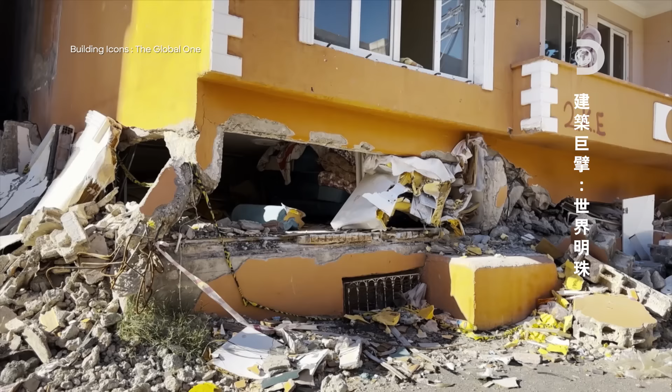To do so, it's having to meet challenges that few other building complexes have to face.

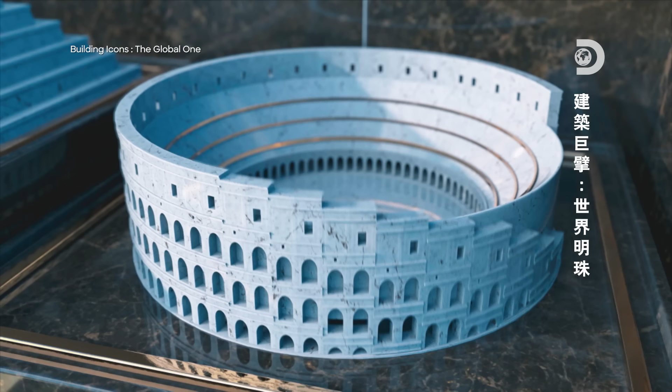That's why they call it the Global One. Taiwan is part of the Ring of Fire around the Pacific, a seismically active zone prone to earthquakes and volcanoes. It is also a typhoon basin, and storms sweep through on an annual basis.

This is the world where the Global One, an ambitious high-rise project, is being constructed. So building a new residential complex is a challenge in itself, and the Global One is not just any residential complex. It will consist of 250 residential units and 54 floors of offices. It's going up as part of a new urban center for Taipei in a district called Nangang.

It will center around several key landmarks. Nangang Station, a major rail hub 20 meters underground that serves as the main entry point for the whole area. The National Biotechnology Research Park is an innovation center built with sustainability in mind. The Taipei Music Center is the largest pop venue in Taiwan.

It's also a hub for music and cultural activities designed to promote culture and bring performers, creatives, and the public together. And then there's the sprawling Nangang Exhibition Center, which brings in the crowds for trade shows that present Taiwan's technology and innovation to the world.

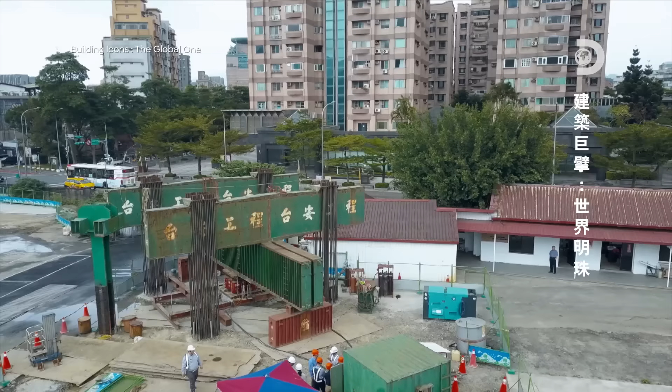In Nangang, every week brings something new. A city shaped by people, creativity, and the constant rhythm of events that never stops. Building a huge complex complete with multiple high-rise blocks is never going to be easy. The Global One's originator is determined that it will stand strong and endure. That's not going to be easy in Nangang. It means taking on some particularly risky geology.

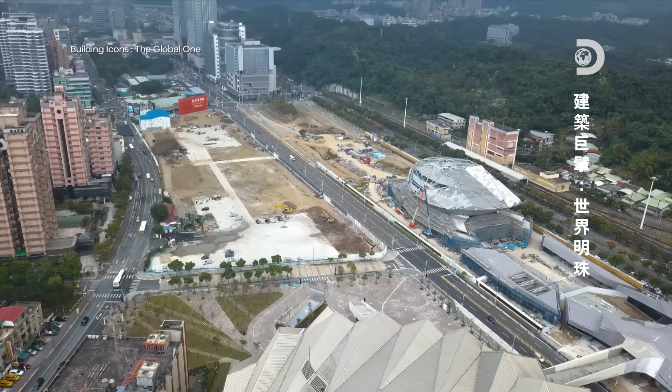There's a groundbreaking ceremony. Even as it's happening, Nangang's special vulnerability to earthquakes is at the forefront of everyone's mind.

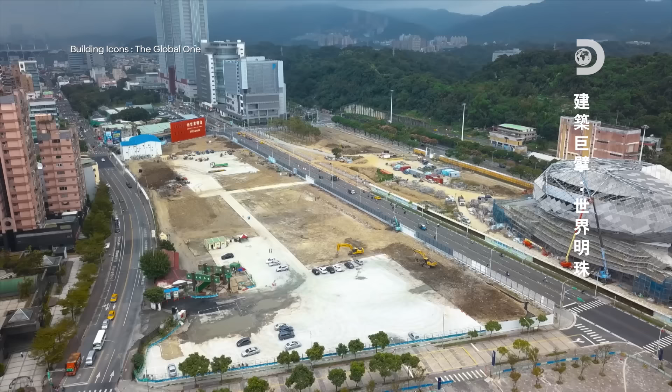The Global One is being built on the site of a former tire factory. It's being built to make a statement and to last for generations of Nangang residents. The ones carrying out the vision? The owners of the original tire factory.

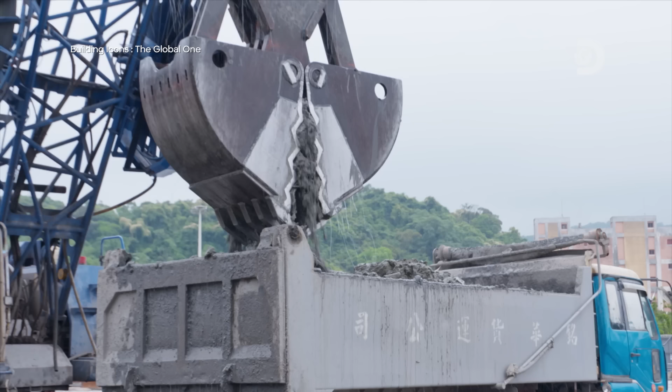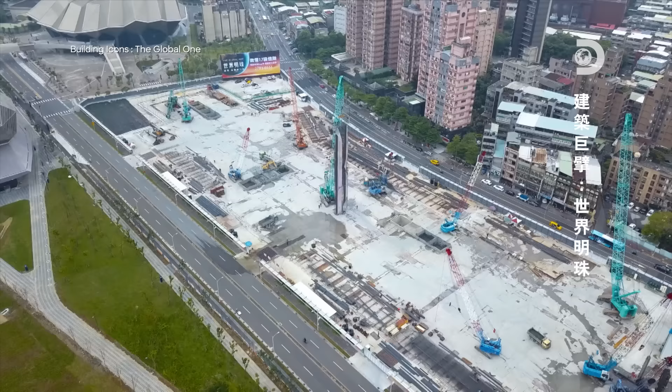Chairman Lin's vision is clear, but making it a reality is going to be particularly challenging. The biggest challenge is coping with the soft soil. The Global One has to be built both upwards and downwards at the same time, growing out of a set of ground-level slabs. The base is surrounded by a diaphragm wall 1 meter thick and 37 meters deep. The wall combines with a set of piles to form an artificial rock plate that anchors the buildings.

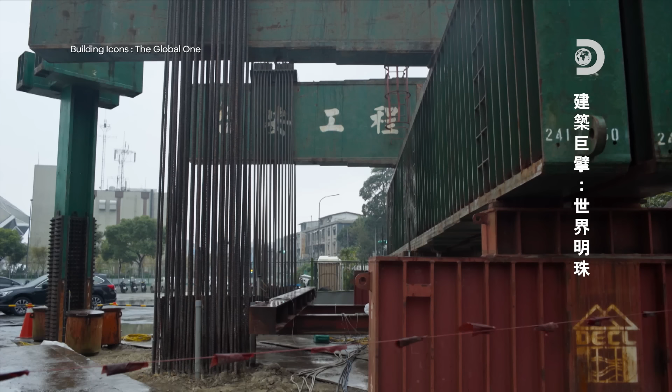Before anything goes into the ground, the piles have to be tested. A total load of 3,400 tons is placed onto a sample pile to ensure it can withstand everything asked of it.

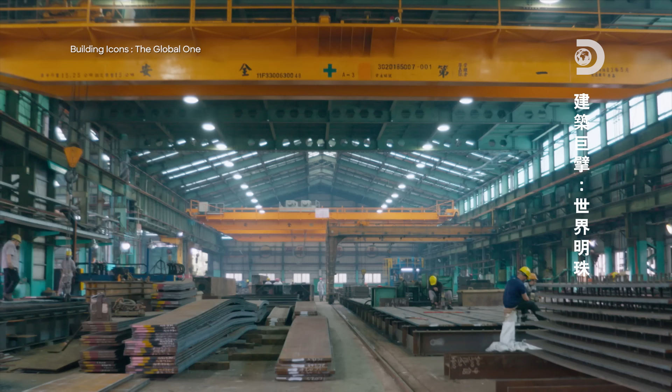It's tough work, but it can't be avoided if the Global One is to be safe. A steel factory on the outskirts of Taipei. Hundreds of massive steel columns are being manufactured. They're going to form the skeleton of an extraordinary new development, the Global One in Nangang. The building complex is being designed to withstand anything that nature can throw at it.

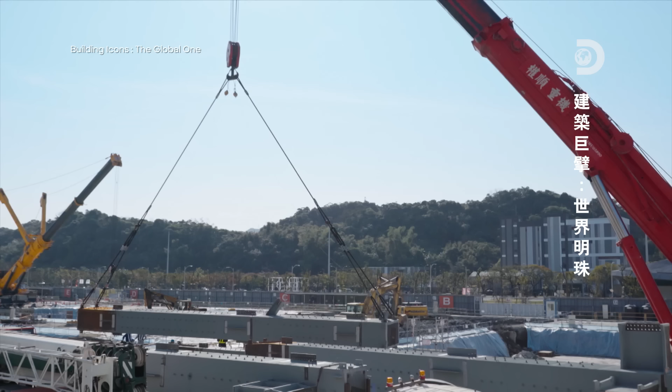Today, the first steel beam above ground is being erected, a significant milestone for the entire team.

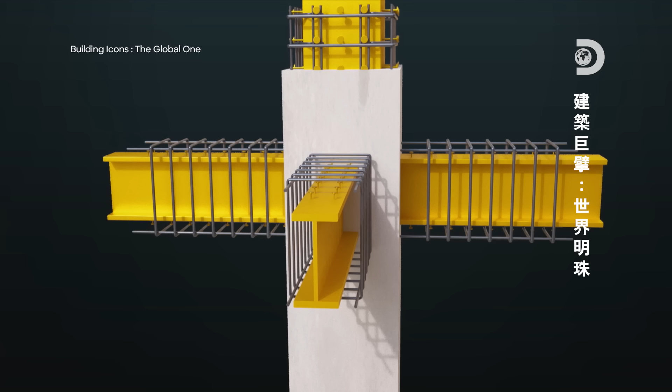The columns and beams are assembled in such a way as to maintain integrity and dissipate energy from any seismic event or strong typhoon winds, themselves an additional force to contend with in Taiwan.

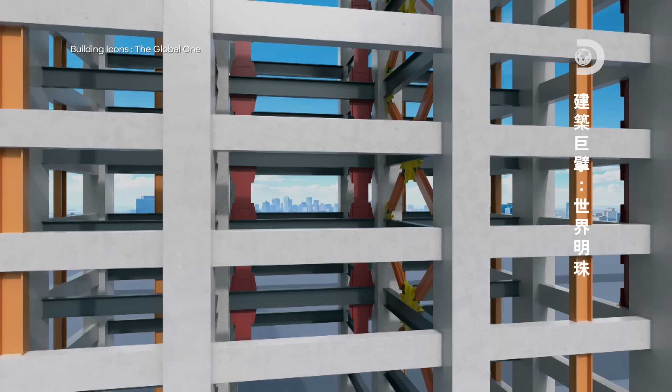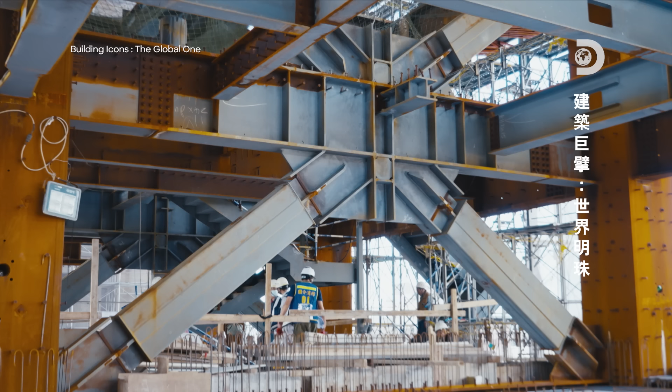The internal materials of the braces absorb seismic energy when nature strikes.

The floor layers make the building's overall rigidity better, preventing excessive swaying. With foundations and a skeleton like these, the Global One isn't going anywhere.

Even in the case of the most severe earthquakes, the priority is always the safety of the residents. Even so, earthquakes will cause the building to shake, which can be terrifying for the people inside.

So the designers are finding ways to minimize the building's movement.

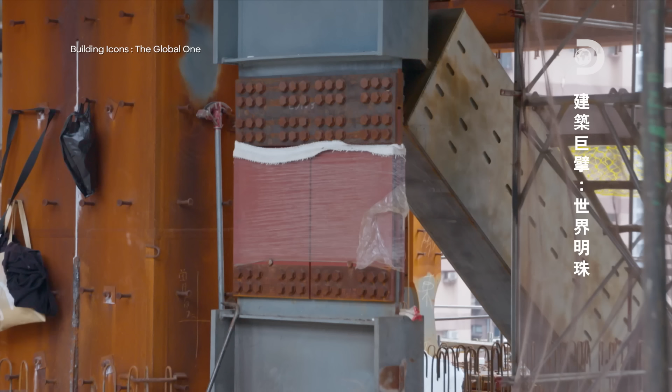They do this through nearly 800 special units in the wall, designed to reduce the amount the buildings will sway in strong winds and earthquakes, damping down any oscillations and making the buildings feel more secure to the people inside.

With these dampers absorbing the motion caused by an earthquake, the building should feel more stable if the worst happens.

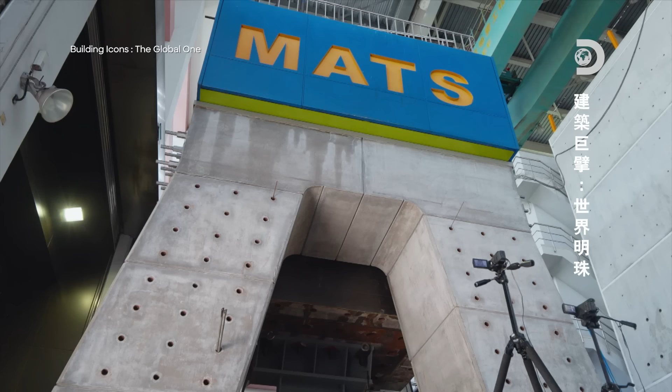But of course, just like the piles earlier, the damper structures have to be tested. Nothing will be left to chance when it comes to safety. So the team have to set up their own testing lab at the National Center for Research on Earthquake Engineering.

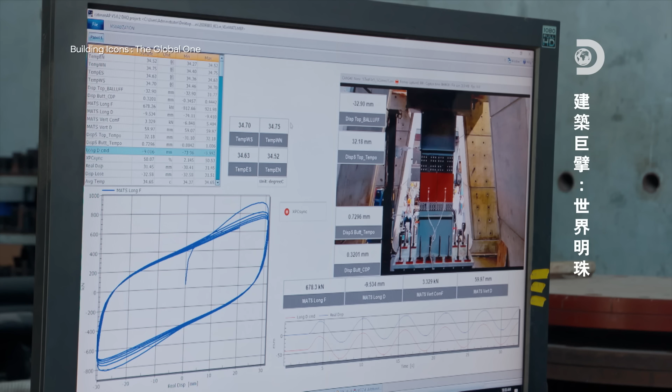It's more commonly used in the high-rises in Taipei's central business district. But if people are going to live in the Global One, they're going to need to know that their building has been subjected to tests like these.

The Global One receives a safety rating up to the intensity at which nuclear power plants have to be shut down. It's a greater rating than even teaching hospitals, among Taiwan's most protected buildings.

The engineers are determined to make the Global One last.

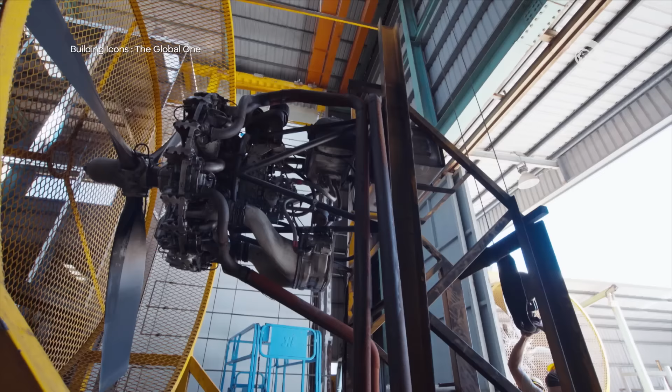The Global One will have to be strong enough to resist Category 17 winds with speeds up to 220 kilometers per hour. This is a strength equivalent to standing behind a jet engine at full throttle. It's the strongest wind possible beyond the power of any normal typhoon.

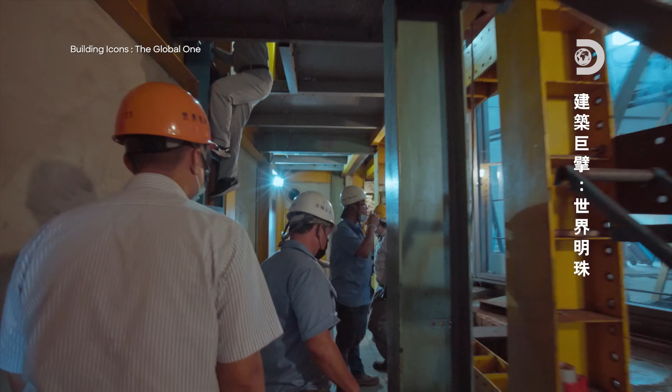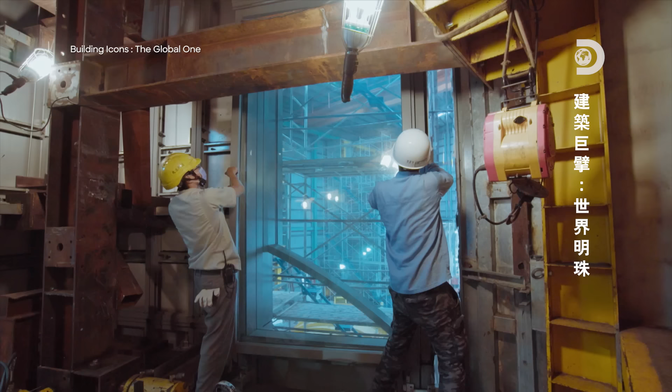Can it take the pressure of all this wind and rain?

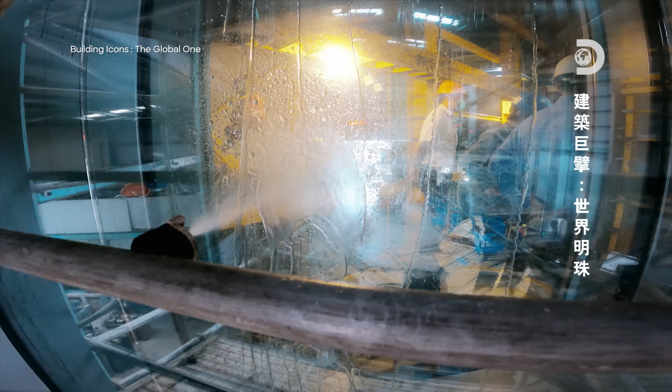High-speed fans and walls of water blast the construct. The test typhoon has been unleashed.

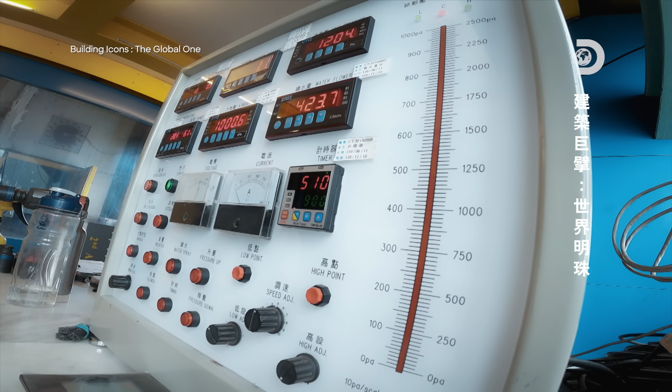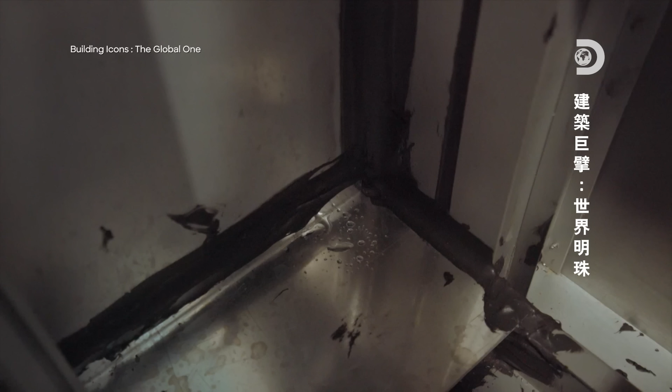Every part of the rig is monitored. The engineers scramble. There is a leak.

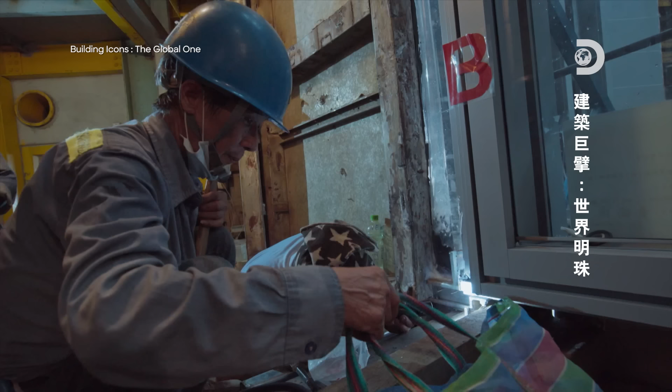For now, the engineers fix the leak quickly with silicone sealant.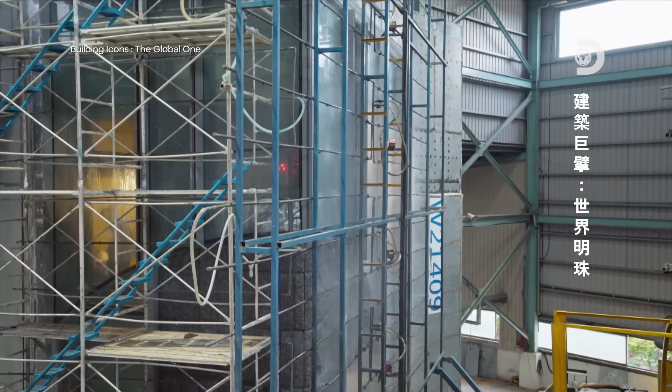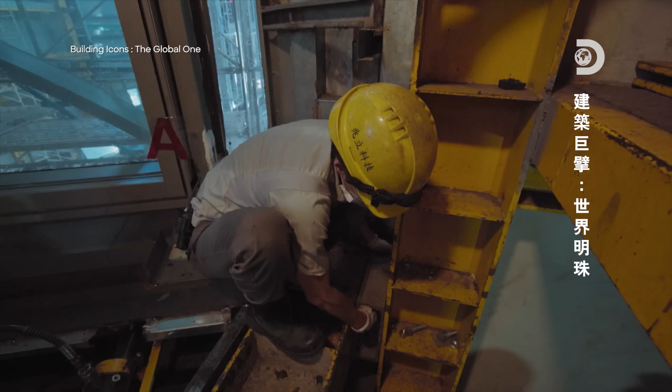The force of an earthquake mostly hits sideways. Can the walls flex with it without being damaged?

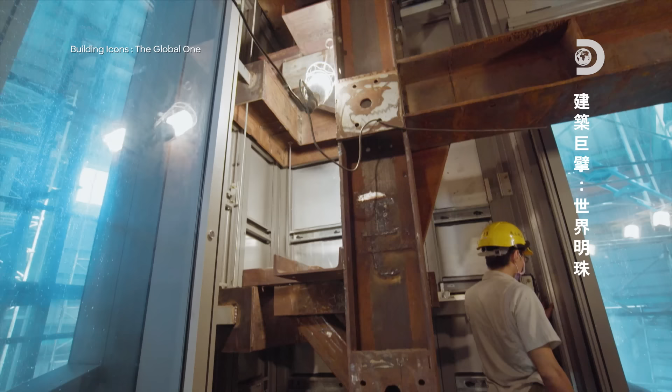It's a success first time around. Once the construction has been fully tested, the window units can be fitted onto the building.

They're 2 centimeters thick, enough to keep out even the worst rain, wind, and noise.

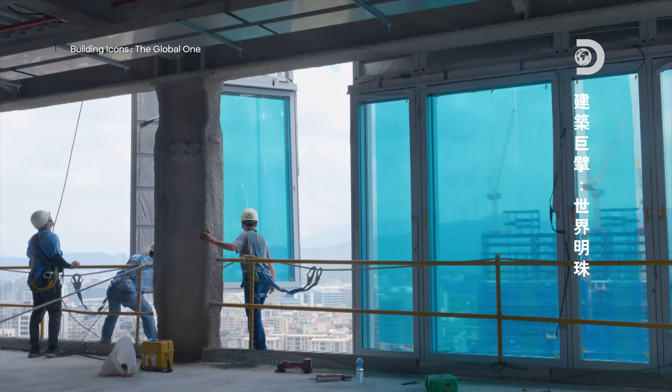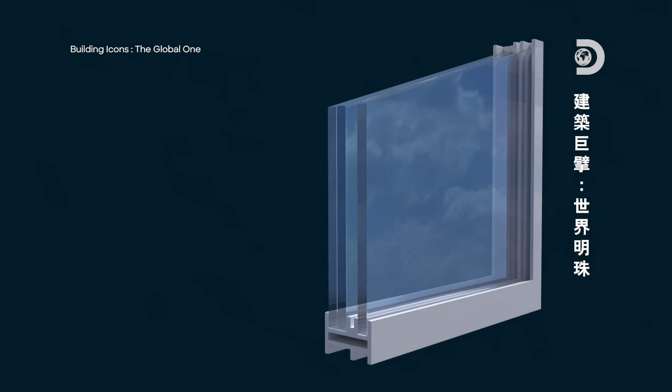The windows contain many layers: tempered glass, explosion-proof coatings, another layer of tempered glass, another coating, a gas layer, and one more layer of tempered glass.

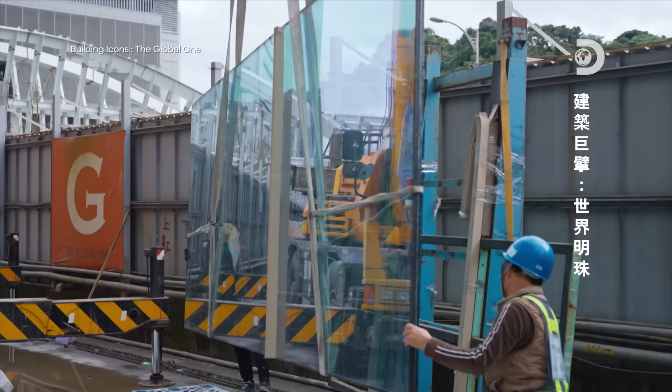The main windows in each apartment measure around 6 by 2 meters. They are not only huge, but they are heavy, almost a ton each. Getting them in place is going to take weeks.

20 workers needed 2 hours to just get one of these windows fitted. There are going to be 46 of these, and 500 more panoramic windows of almost comparable size.

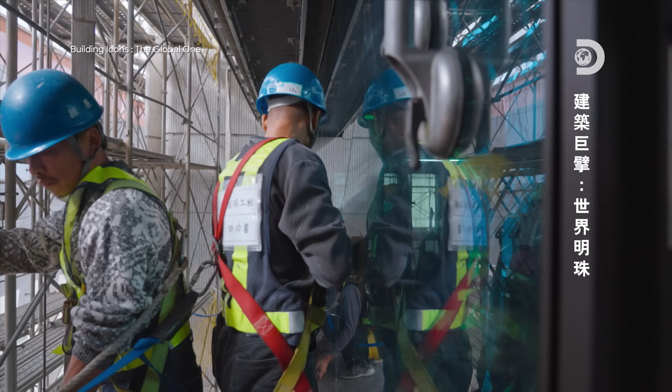The glass is just one of the main features of the Global One, but the rest of the exterior needs to look just as good. And that means more challenging materials.

The Global One, a huge new building complex in one of Taipei's former industrial zones, features a monumental amount of glass on its exterior. The rest of the building is concrete, and this needs to be covered.

Taiwan's buildings are often clad with many thousands of tiles, but these are essentially just stuck on, and over time can become detached, looking ugly, and causing a real danger to anyone below.

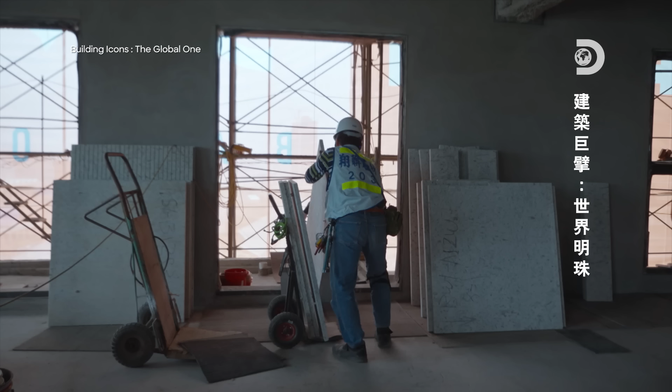So instead, the Global One will be clad with another premium material, granite. The granite slabs are large and heavy. Should one fall off, well, it would cause a lot more damage than a simple tile.

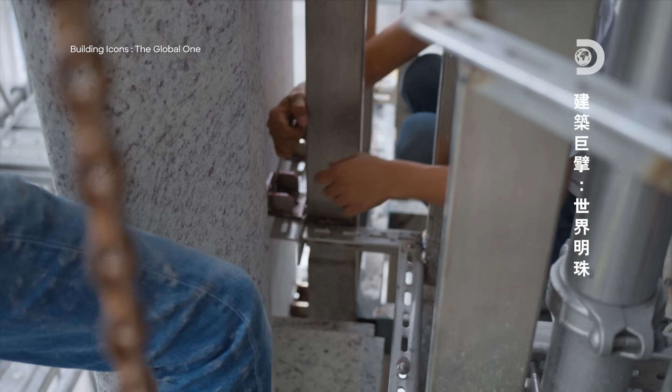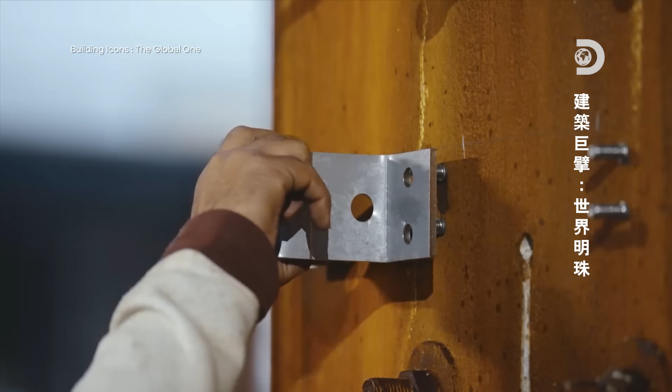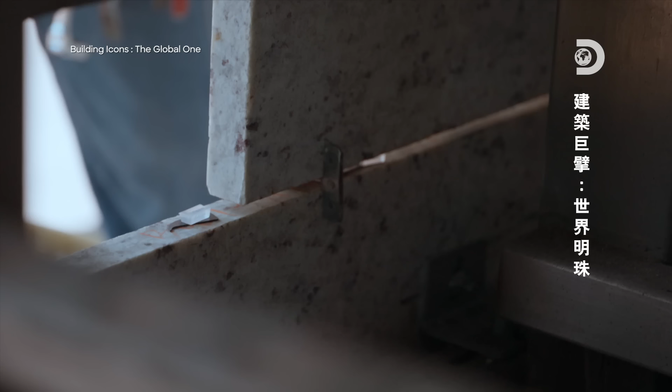外墙石材，目前整个工地量体非常大，有145万多材，重量一片最重达到450公斤。为了克服这个问题，在混凝土还没有灌浆之前，在钢柱上面先植入喜得丁的螺旋螺栓预埋件，然后在表面上做配筋补强，再灌10公分的包覆混凝土。安装石材时，把钢构上面的铁件再跟骨架系统连接，确保强风强震时没有问题。The way they are anchoring the stone cladding means their weight is transferred to the inner steel frame, and from there to the main body of the building. The cladding becomes part of the actual structure, not just a covering, and cannot be pried off by high winds.

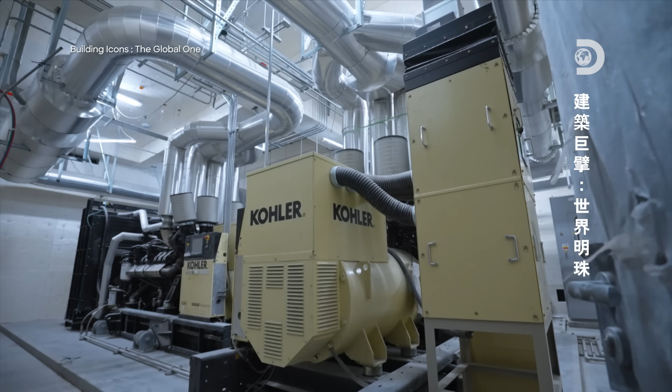A building is more than just its fabric. A constant power supply is vital. The Global One has 2 main power supplies, so if one is damaged in a seismic event, the other will hopefully remain intact. And should the worst happen and both are put out of action, the building has 2 power supplies of its own. 消防的是2台1500千瓦的发电机在B1，万一停电的时候，它会自动转成发电系统，供应整栋大楼维生的消防设备，适时供应电源，不会影响住户的生活品质。发电机容量至少可以让它在8小时以内运转都没有问题。

A defining feature of our time has been the global COVID pandemic. There are always concerns when people are living in close proximity with shared resources. Some experts even fear there will be a major epidemic every 10 to 15 years. The Global One is designed with systems to minimize the spread of an outbreak of airborne disease.

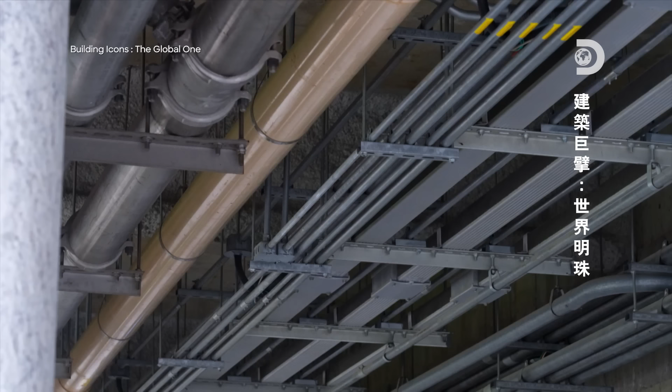我们是用单独的管道间去克服这些病毒，每一户都有固定的施气阀，让空气可以出去，但不会进来，让病毒可以排到管道间，直接排到风机里面。但其他楼层的病毒不会经过管道间，爬到当层的住户里面。Each home has its own aircon system.

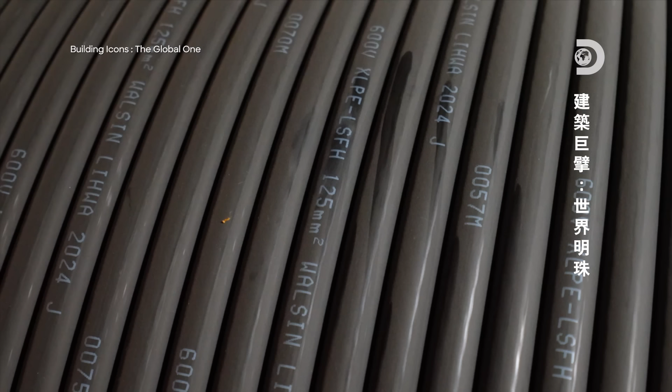A heat exchanger brings in air from outside and expels stale air. But the heat energy in the warm air is captured on its way out to reduce the load on the system. Interior materials have also been considered very carefully. Paints are all non-toxic and lead-free. Everything has to be hypoallergenic to keep the people inside comfortable. Even the cabling has been carefully selected.

我们用这种无烟无卤的电线，真的碰到火灾的时候，它不会产生浓烟，也不会助燃。它几乎把一些传统电线可能产生的问题全部克服掉了，但相对它也非常贵。这些都是我们对客户所做的承诺，跟我们对生命的尊重及保护。Water and waste pipes are all made from stainless steel to ensure they're strong and will last a long time in top condition.

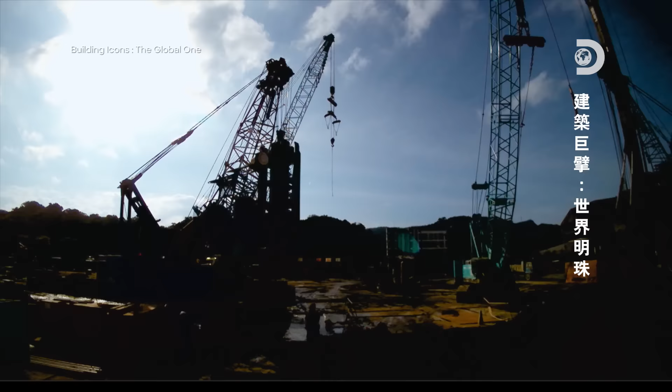And that's what one dedicated part of the team has been looking at. The Global One is going up as part of the regeneration of Nangang, a former industrial zone in Taipei. It's a huge mixed-use complex, and the vision is to make it one of the best places to live. With so many residences and offices over an area of 30,000 square meters, there needs to be a lot of planning to get everything just right.

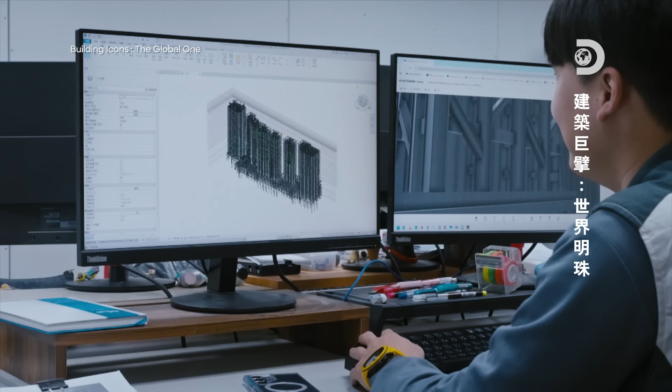Major public projects often use a system called Building Information Modeling, or BIM. So that's what they're using here. The whole complex is simulated in a vast computer model, so any errors or inefficiencies can be spotted before they're built in.

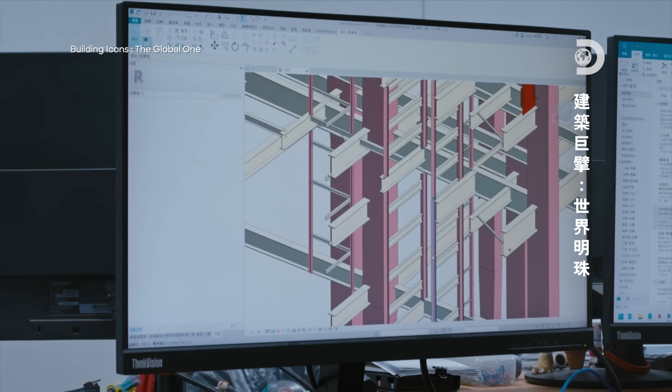A separate climate simulation system has been used to work out how to keep all the apartments comfortable at a pleasant, even temperature, which isn't always easy in the hot sun of Taiwan. And within a steel and glass building, you can, of course, use aircon, but it's expensive and no good for the environment. So at the Global One, they're introducing a special sun tracker.

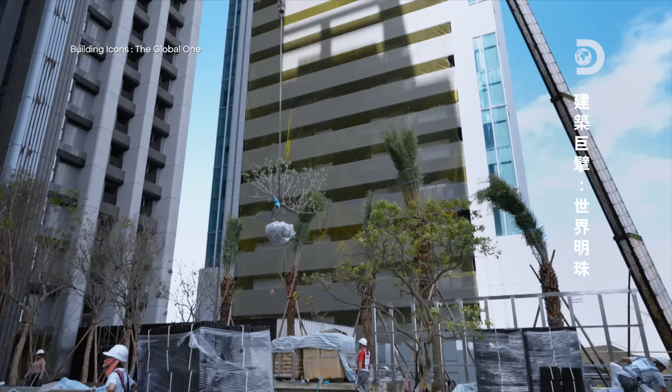Of course, all this water, soil, and green mass is very heavy. The engineers have to take all this additional weight into account in the design.

里面是空的，弄点水，让它不要有空隙在里面。我们先以每平方2吨的重量来设计我们的结构，一般在公共建筑，楼板最多载重也是到500公斤左右，我们在瀑布的部分跟水域的部分甚至提升到3吨，在2楼的部分，我们的梁排得非常密。

All in all, the green areas at the Global One cover over 8,000 square meters and reach all the way to the nearby mountains. It's designed to connect the people that live here with the natural environment beyond.

需要住在森林里面，说山中有林，林中有屋，这种的期望。我们种一些牡丹、茶树、马缨丹这些东西，山茶花比较能够诱蝶的那种植栽。诱鸟的部分，我们有种一些果树，荔枝、杨梅、树葡萄这些，吸引鸟类来这边采撷，营造出自然共生的环境。

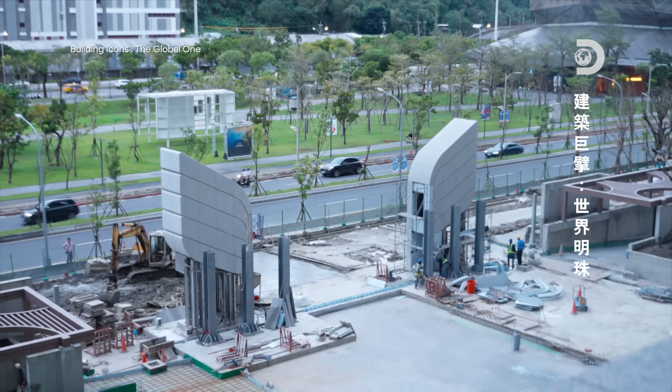One of the last elements to go into the new Global One complex in Taipei is about to be fitted. The craftsmen are putting the final touches to a set of bronze gates. As the first thing anyone will see as they enter the complex, they have to be just right.

大门的话，单扇是3吨，组起来会到6、7吨以上，所以非常重。在结构上面，我们都有做过结构计算、风压测试。

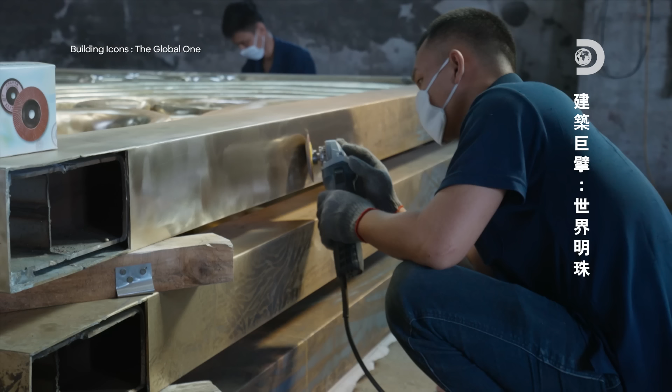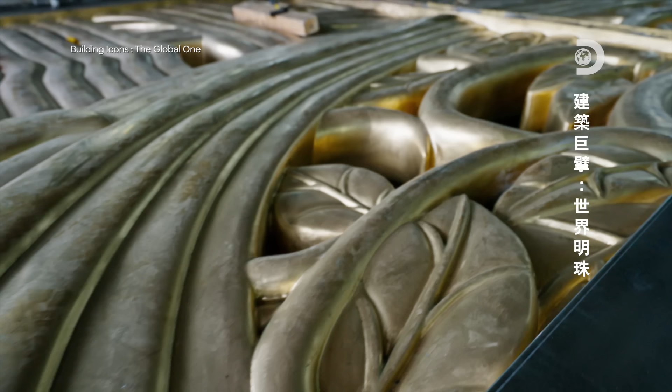这个锻造手工打磨拢不一样。表面处理颜色的部分，希望把叶子跟边框改成稍微暗褐色的方式，让它感觉跳脱出来有渐层，让这个大门看起来不会太单调、太死板。我们会先做一面起来看看，然后再继续调整让他们满意。

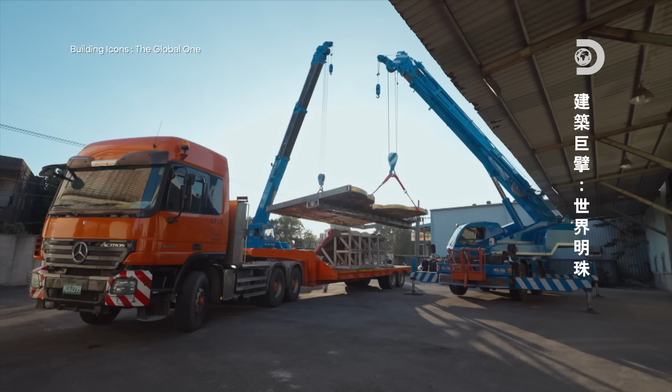大门大概有12米，高度大概5米多。工厂制作完成到台湾之后，在工厂这边也会做一些假阻力，确认吊装没有问题。这个尺寸要运送到工地，一般的拖板车可能都是困难。The gates are ready to go, but they are too big to get through the factory gates lying flat. And if placed vertically, they will collide with streetlights and other obstacles en route. So a special frame has to be constructed to hold the massive gates on a slant. Nonetheless, the gate only just clears the road signs as it travels.

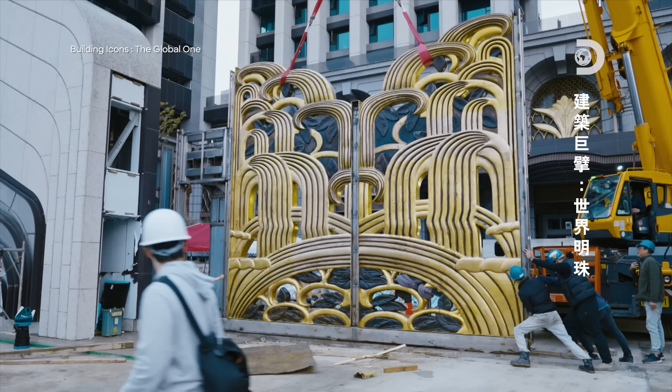As the gates are being fitted, the team can look back on the challenges they encountered during construction.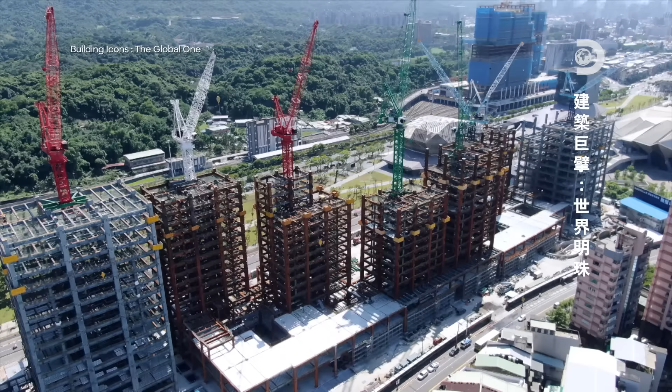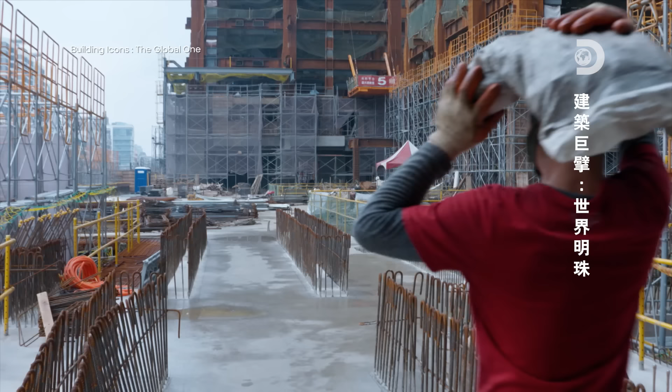这么大的量体，这么高规格的设计条件之下，能够不要延误工期，如期安全，品质没有问题下把它完成，每一天事实上都是一个挑战。后面来的时候刚好是在我们基桩做完成以后，紧接做结构体，所有的施工人员都非常紧绷，我不能让工地停摆，也不能让工进落后。高峰期我们的施工人员还能有1000个，其实这是很不容易的。

南港已经不是台北的南港，是世界的南港，大家共同的理念就是要盖好它。It's a reminder of Nangang's long industrial heritage, while at the same time marking the beginning of a new era. Chairman Lin, the driving force behind the project, sees the Global One as the symbol of a new forward-looking Nangang.

This should be his legacy. When people think of Nangang, they should think of the Global One and him. 我坚持，无形的价值就是最大的价值。我告诉团队，也就让老板任性如此吧。It's these ideals that have been built into the very fabric of the Global One.

林董当然希望他设计的东西是独一无二的，而且要最好，所以这给我们很大的动力跟压力。他说你只要帮我盖成世界第一栋，你只要负责帮我选最好的建材，其他你都不用管，钱的部分我来处理。这让我非常感动，怎么会有这么好的老板？